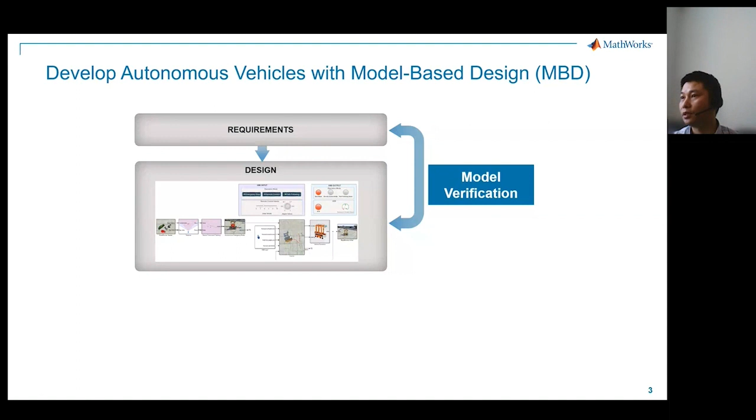your experience. Okay, and then we start kind of the iteration between the design and the requirement, and we can also verify the models with our design. So that's called the model verification phase. So in this phase, it is expected that we can find most of the bugs or the defects with the requirements or with our design. So that's the value and the benefit of using model-based design.

Okay, so after this phase, we can transition to the deployment, meaning that we can utilize the code generation products to generate the code instead of writing the hand code from scratch. And then we can start to verify the code with our design and the requirement. And this phase is called the code verification phase. Okay, so this is a very high level overview of model based design. So we start from requirements to design to deployment.

Okay, so if we go back to the topic on how MathWorks supports developing the autonomous systems with model based design. So what MathWorks offers covers ground vehicles, the UAV applications, marine robots, as well as manipulators.

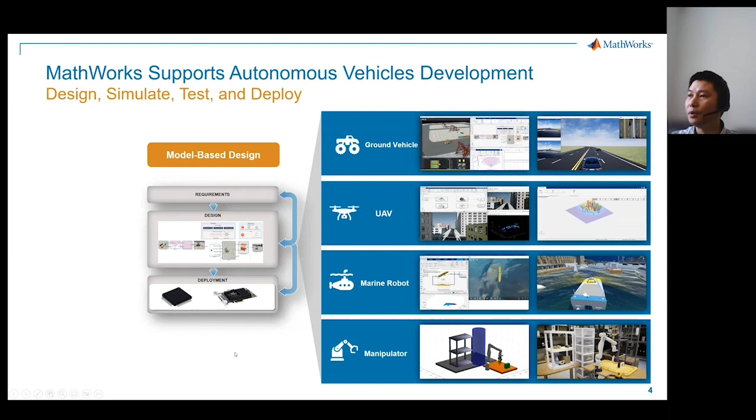Okay, so all these applications have similar technical areas such as system engineering, sensing, perception, planning, control, and modeling the vehicle platform. And also it covers the deployment, integration testing, connecting to the third-party simulators, let's say through ROS, and the verification and validation activities. Okay, so I hope this picture gives you an overview on what the MathWorks tools offer for the autonomous systems.

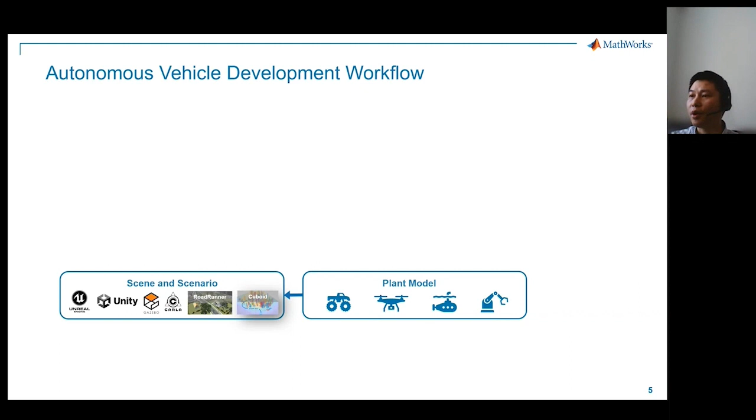And if we look at the data flow of how to develop the autonomous vehicles in more detail, we always get started from modeling the plant, meaning modeling the systems and modeling the vehicles. Okay, and then we also get started from modeling the environment. So we call it scene and scenario. And this scene and scenario could be in MATLAB environments such as the cuboid, which I'm going to introduce later on, or RoadRunner, as well as some third-party simulators such as CARLA, Gazebo, Unity, and Unreal Engine.

Okay, so once we have the scenes and scenarios, we can add the virtual sensors to get the synthesized sensor data, such as camera, LiDAR, radar, and some inertial measurement units.

Okay, so when we got this sensor data, we can feed these into our perception pipeline. So the perception pipeline depends on your use case, such as it might have the detection pipeline, the multi-object tracking pipeline, SLAM, localization and mapping, and estimating the risk or the threats.

Okay, so after the robot or the vehicle understands the environment, then we can start the planning. So the planning can be decomposed into different, I would say, phases or levels, such as behavior planning, path planning, collision avoidance, and trajectory generation.

So the last part of this data flow is the control. It contains, such as, the path following algorithms, the guidance for UAV applications, the low level, let's say the inner loop controller or the actuator controller. And then we can close the loop to the plant model. So this is the very high level data flow for developing the autonomous systems.

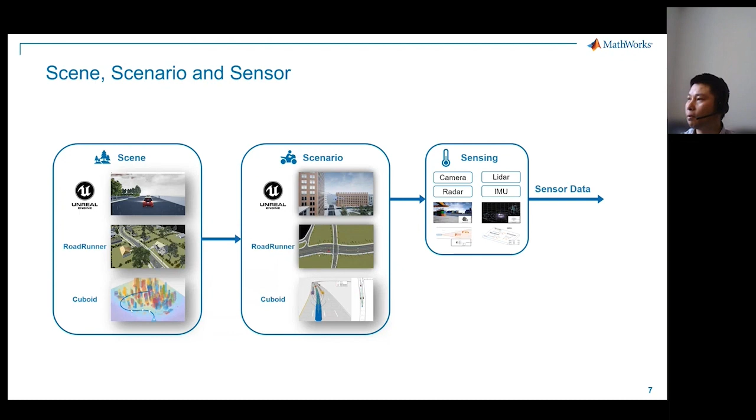And on the other hand, since we created the scene and the scenario from this simulation environment, not only can we get the sensor data, but also the ground truth. So this sensor data and the ground truth will be fed into the perception pipeline that I'm going to introduce later on. But right now, let me take the opportunity to introduce what MathWorks offers for creating the scenes and scenarios and the virtual sensors.

Okay, the cuboid simulation environment. So it looks like this. It's a simplified simulation environment, not photorealistic compared to Unreal Engine. And this shows the scenario designer app from the UAV Toolbox. So you can create a cuboid simulation environment interactively in this app. So this is the editor for the scenario and the viewer for the scenario.

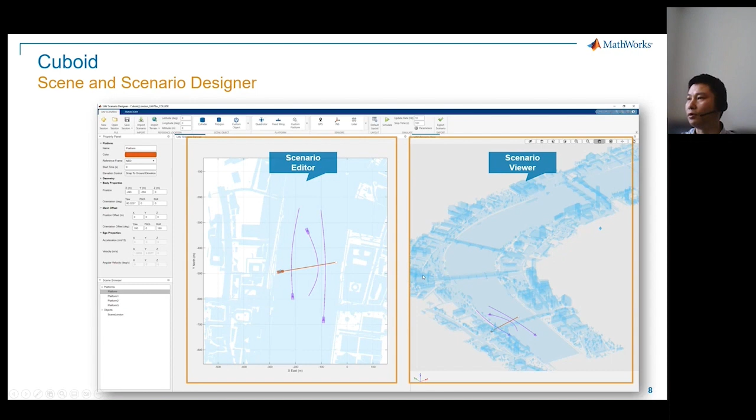And you can add scenes such as this cylinder or this polygon shape or any custom objects, such as this city scene. This is actually from London. This city scene is from a CAD model. If you have a CAD model, you can import it to create a scene. And likewise, you can add vehicle platforms such as UAVs, boats, or ground vehicles, and you can add your custom CAD model into the scene as well.

We also offer a bunch of different kinds of sensors such as GPS, INS, and the LiDAR sensor as shown here. We also have the property editor that allows you to edit all kinds of parameters, such as the parameters for the vehicle platform or the parameters for the sensors. And the last thing, this shows the actor list of all the actors that we have added into the scenario editor. So here is a recorded video showing how we can create these scenes and scenarios from scratch.

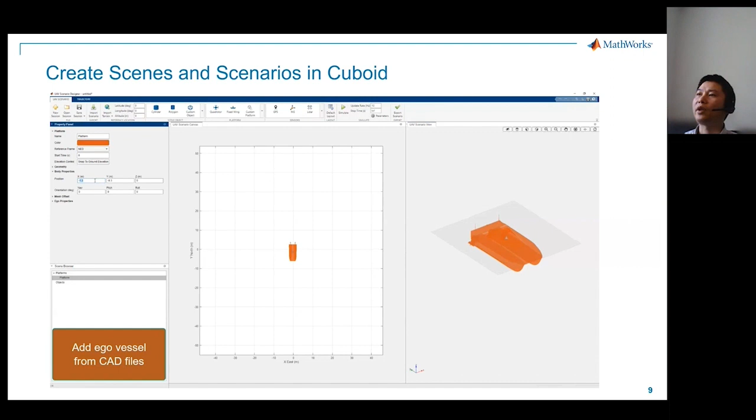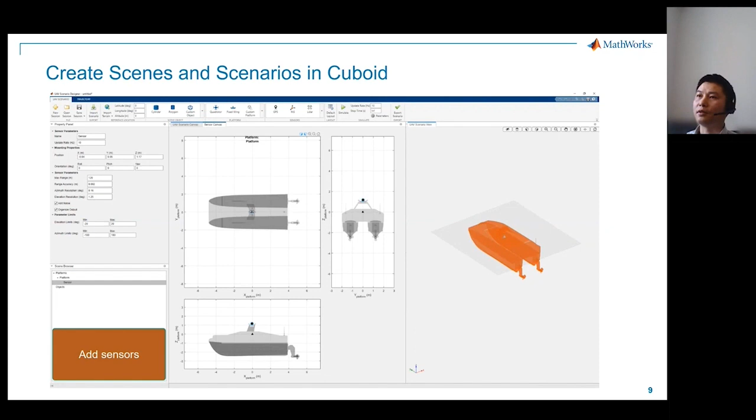So first of all, we import a CAD model. This is a boat, right? So we import the CAD model of a boat into the scene, and then we start editing a couple of parameters such as the colors or the locations and the scaling, and we also started to add, let's say, the LiDAR sensor. Yeah, exactly. And we can allocate the position and orientation of this sensor relative to the vehicle body. And after that, we can add more actors into the scene.

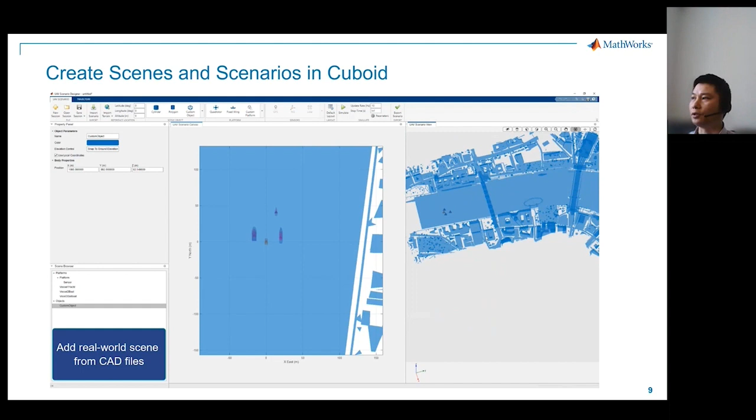And we can also specify the path, the waypoints for each of these actors, interactively. And we can also enable the trajectory table to specify, let's say, the speed and the timing in detail. After that, we can perform simulation directly from this app. So if we click the run button, then you can see the simulation result. And this is only for the scenes and scenarios viewing.

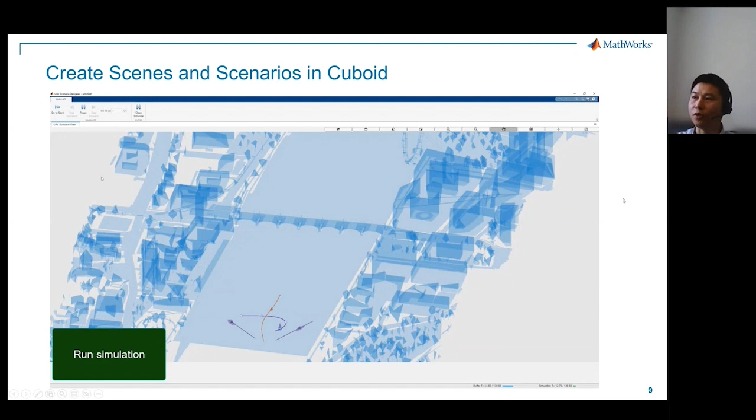Okay, I hope these recordings give you an overview of how the cuboid scenes and scenarios have been created. And we also offer a similar cuboid designer app dedicated for sensor fusion and tracking purposes, let's say for UAV applications. It's from the Sensor Fusion and Tracking Toolbox. It's called the Tracking Scenario Designer.

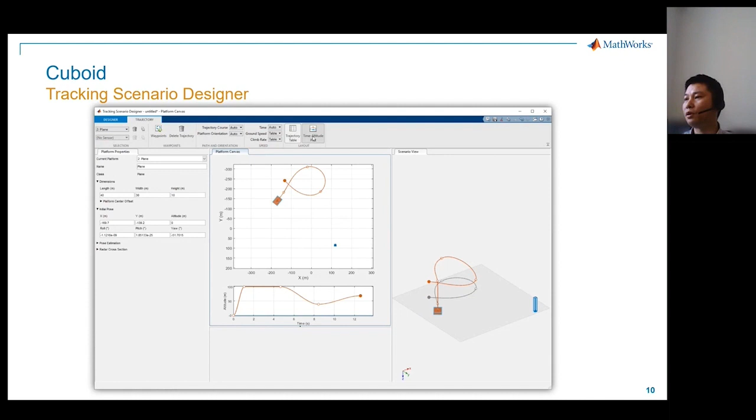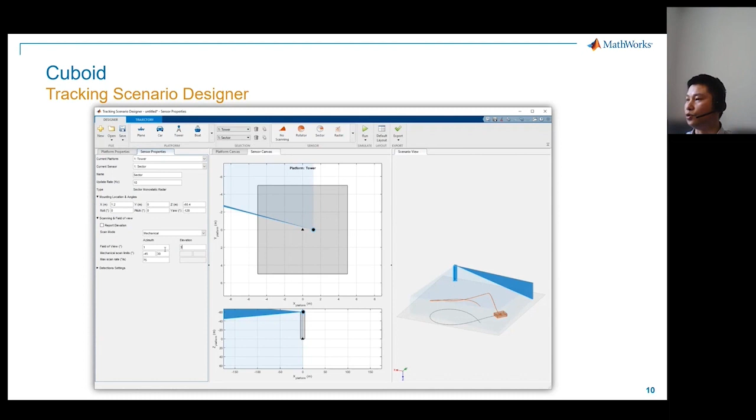So this is one of the examples showing how you can add the sector radar scanning the objects. And as you can see, the orange are the UAV objects. And we have specified the trajectory for the UAV. And we are adding a couple of these parameters for this radar and perform the simulation. And this is how it looks like in the app.

Okay, so the good thing about using the cuboid is that it's a simplified simulation environment. It's quick and easy to use, and it also brings you the value of creating variants for the scenarios. So you can create various kinds of scenarios and various kinds of static scenes, let's say adding obstacles and adding different sensors for trade-off studies for verifying your design.

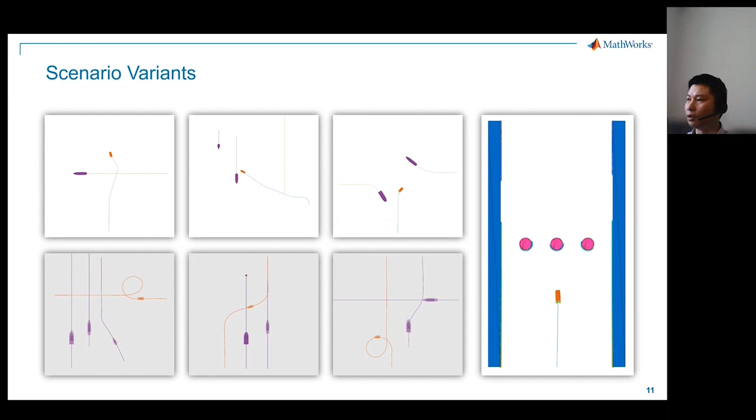And I would like to highlight the radar sensors from MATLAB and Simulink. We offer two different kinds of radar sensors, and both of them can mimic the ghost effect because of the multipath return. One we call the measurement level radar sensor, meaning that it is a relatively low fidelity model from, let's say, Automated Driving Toolbox or from the Sensor Fusion and Tracking Toolbox. And the other is regarded as a high fidelity radar sensor. We call it the signal level radar sensor, and it's offered by the Radar Toolbox.

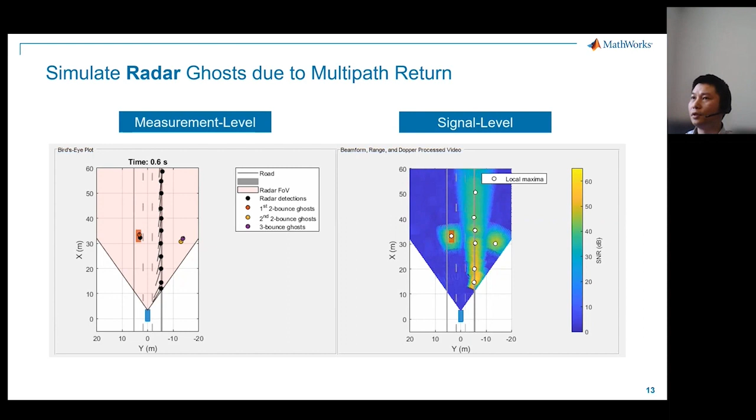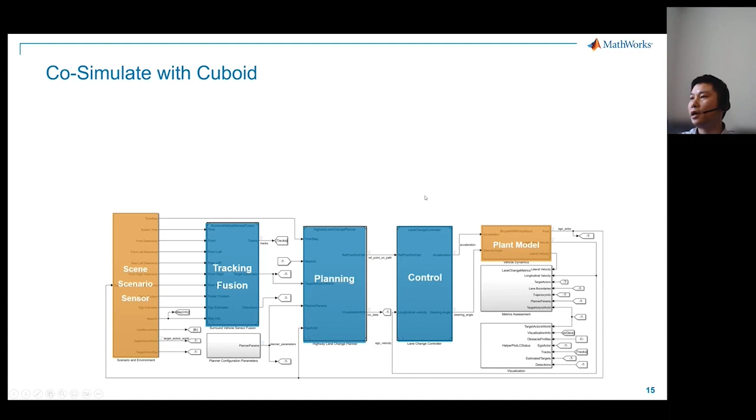And here is another example. So besides these cuboid blocks offered by the toolbox, you can add your software or your design into the Simulink model and perform the closed loop simulation, such as if you have the tracking or multi-object tracking algorithm, planning algorithm, or the control systems design here in Simulink. And here we also have the plant model as well as the cuboid scenario blocks that help you to connect with the cuboid.

Okay, so this is the cuboid. And if you have any questions, please feel free to type in the chat.

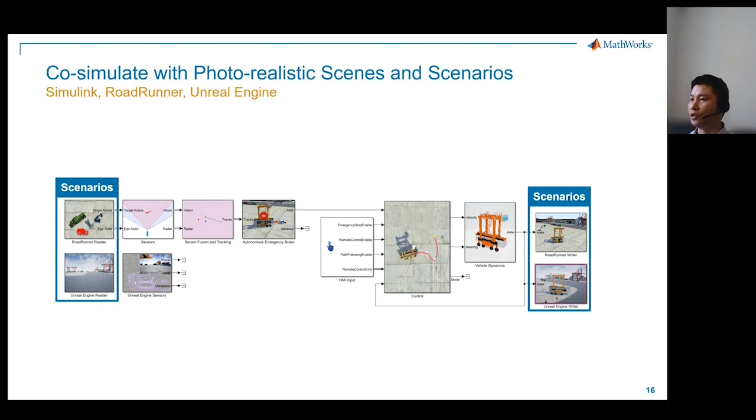So now we have our design in Simulink, and then we have these blocks that help us to connect, let's say, Unreal Engine or RoadRunner. I'm going to introduce RoadRunner in a few minutes. These are all photorealistic simulation environments, and these blocks help us to connect RoadRunner and Unreal Engine.

So this shows the simulation results of the co-simulation between Simulink, RoadRunner, and Unreal Engine. As you can see, there are a couple of sensors, such as the camera sensor, the point cloud generated by the LiDAR sensor, and the ultrasonic sensor in Unreal Engine, which is offered by Automated Driving Toolbox

or UAV Toolbox. And as the Simulink model is running, RoadRunner is running at the same time, at the same time step, and Unreal Engine is running the same way with Simulink and RoadRunner.

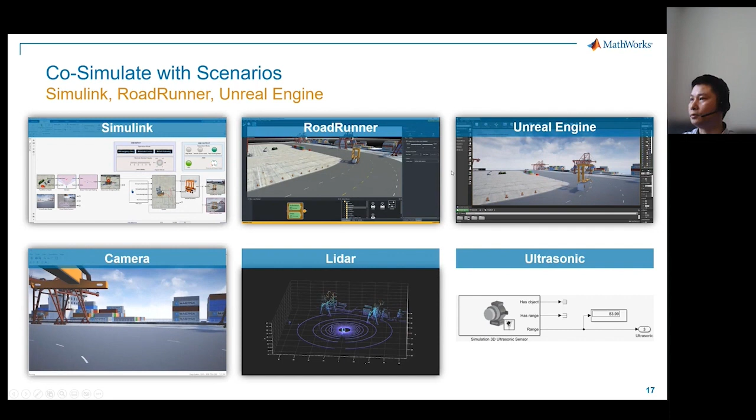And what is RoadRunner? RoadRunner is a tool that allows you to create the environment, let's say the urban city or the highway environment, in an easy way. So here shows an example where you can utilize the RoadRunner tool or the asset library in RoadRunner. Just drag and drop and create a scene.

Let's say you can go to the buildings folder from the asset library, drag and drop the buildings that you like, and place it on the scene. And then you can also use the prop set tool and select the trees that you like, and just drag and drop onto an area of the scene in RoadRunner.

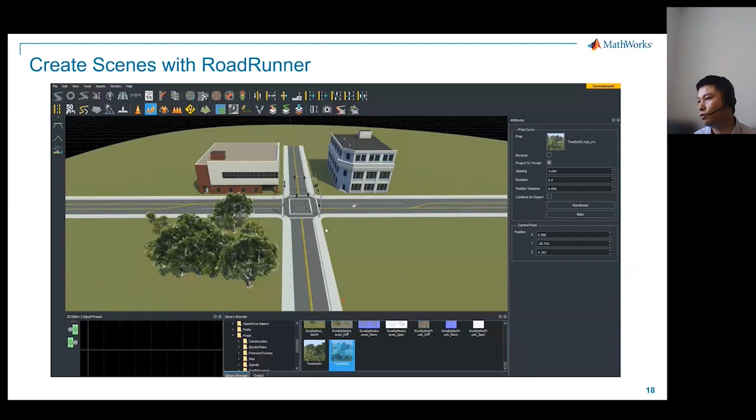And you can also use another tool, this prop set curve tool, to draw a curve on the scene, and then create these prop sets of the trees, and you can export it to different kinds of formats such as Unity, or Unreal Engine, or any other kind of format so that you can utilize this scene created from RoadRunner with another simulator.

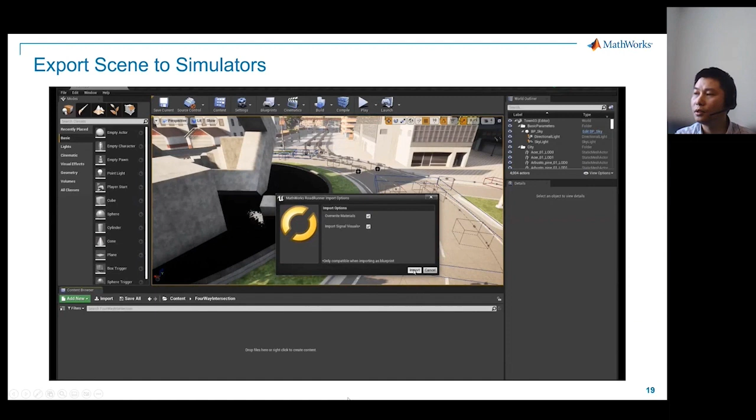So this is RoadRunner, and after you export the scene, you can import it into Unreal Engine. This is one example. I'm going to fast forward this. So this is Unreal Engine, and you can import all the files that we exported from RoadRunner into Unreal Engine. This shows a couple of steps, and it is written in the MathWorks documentation, so you can see this is exactly the scene that we created from RoadRunner, and now it's in Unreal Engine.

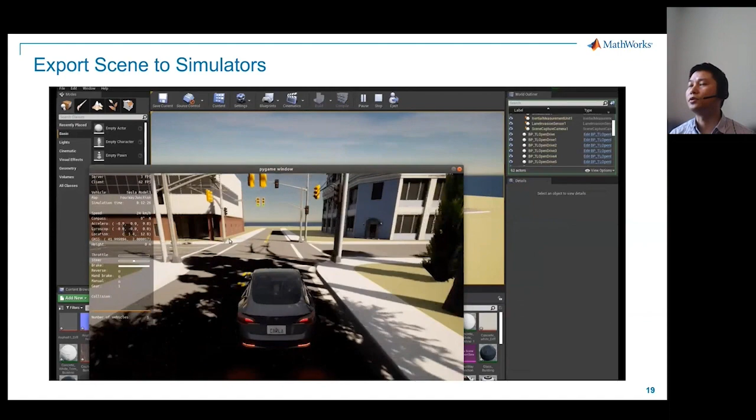So now we have the scene in RoadRunner, we have the scene in Unreal Engine, and then we can start the co-simulation with Simulink. So this is how RoadRunner and Unreal Engine work.

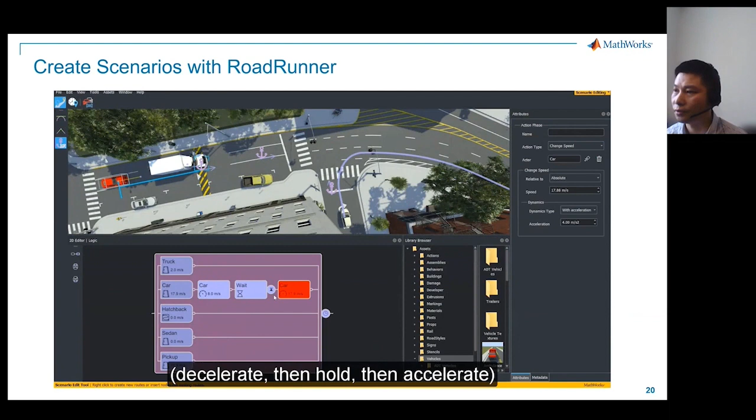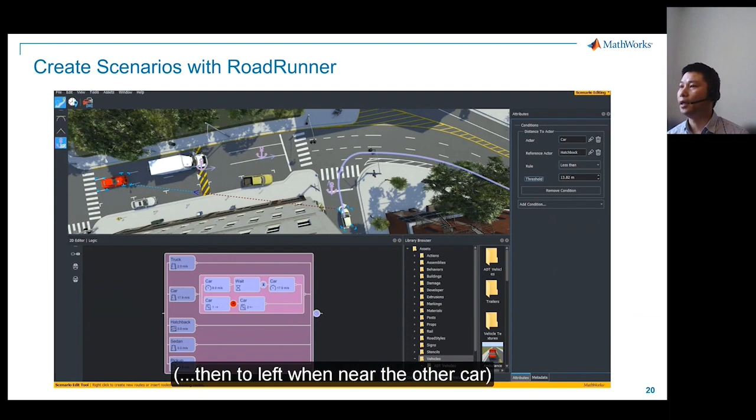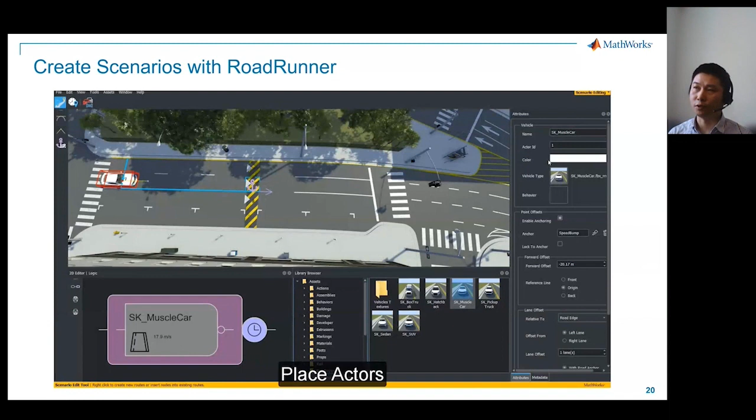And besides the static scene in RoadRunner, you can also create scenarios: we can drag and drop actors from the asset library or your custom assets, and we can specify the trajectories or the behaviors of the actors and parameterize all of this. We can also create a variable or parameter for the speed or any kind of parameter within the scenarios. And we can perform the simulation in RoadRunner to verify our design. So this is how RoadRunner Scenario works for creating scenes and scenarios.

And similarly to the cuboid environment, RoadRunner Scenario also allows you to create scenario variants in an easy way: you can parameterize the speed of the scenario and vary the speeds from 20 to 10 to 5. And you can also specify different behaviors and different trajectories for each actor to verify your design. And this is very easy to create.

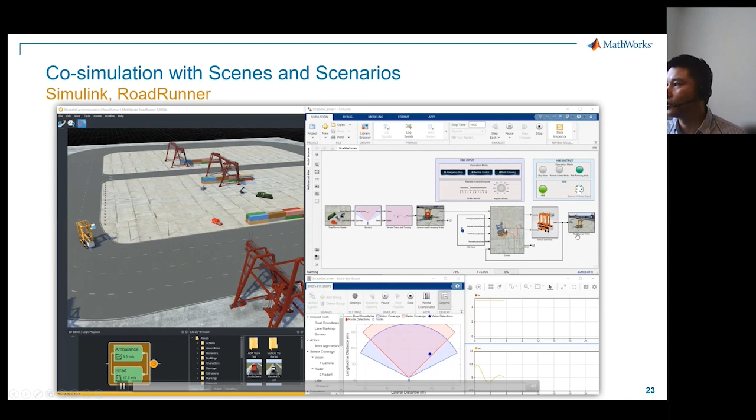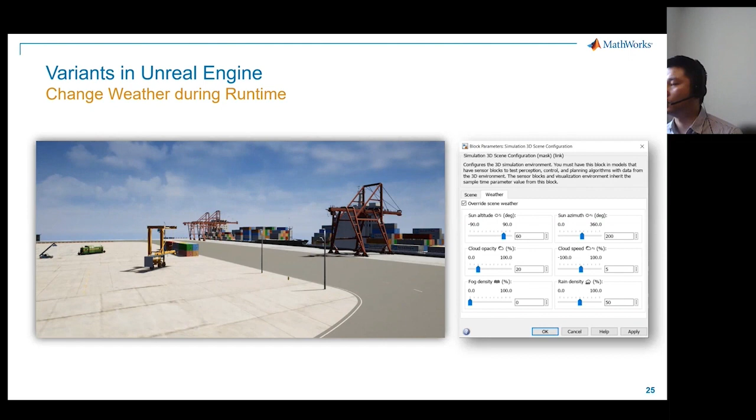One of the benefits of using the co-simulation framework with Unreal Engine is that from a Simulink model, you can vary the weather as well, such as the panel shown here. You can adjust sun altitude, cloud and fog density, sun position, and rain density as well.

Okay, I can see there's a question in the chat. Can we create scenarios with RoadRunner for surface vehicles, or is RoadRunner used just for land vehicles?

Of course. RoadRunner can also be used for surface vehicles. I have a demo, but it's not in this slide. If you like, I can share some of the slides later on with you. So the short answer is yes.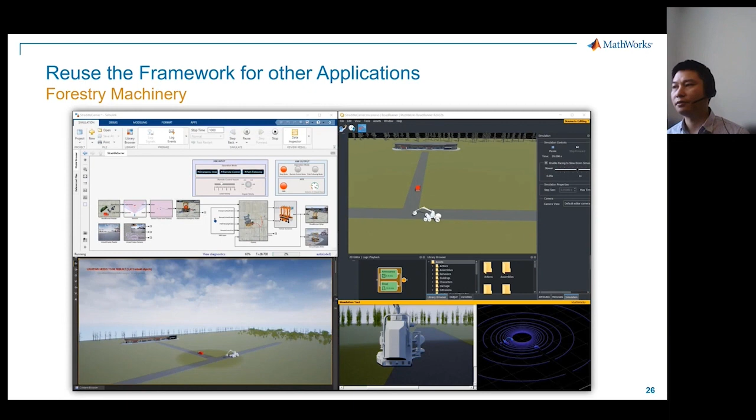So we have introduced this framework of co-simulating between the Simulink model with Roadrunner, Unreal Engine, or Cuboid. We can reuse this framework for any other applications because it's a 6 degree of freedom vehicle platform, such as these applications for forestry machines. We simply reuse the same Simulink model, the same framework, and do the same thing but with different scenes and scenarios, with Roadrunner and Unreal Engine, and maybe different sensors. So this is one of the applications for reusing.

Another application I've done for reusing this framework is mining. So now let's say we have a Simulink model containing a SimScape multi-body excavator model, and at the same time we create this model in Unreal Engine and add a few sensors here. This allows the SimScape excavator model to interact with the gravels from Unreal Engine.

This shows how it works, and it can turn, and then it will also drop the gravels later on. And you can see this is semantic camera, depth camera, fisheye, the point cloud. I hope this can give you some inspiration.

So we have talked about scenes and scenarios, Cuboid and Unreal Engine. We have talked about the sensors in Cuboid and Unreal Engine. And then so now we've got the ground truth, or we've got the sensor data, and then we can feed this into our perception pipeline as a next step.

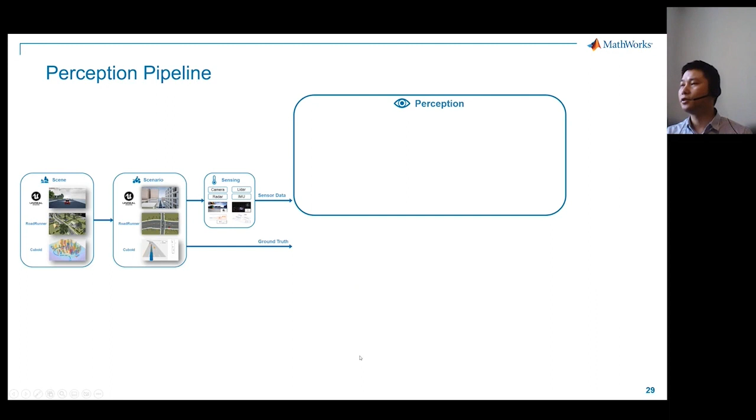So here is the previous figure. We have the sensor data, so then we can feed this into our perception pipeline. The high level perception pipeline looks like this: once we've got the raw data from the sensor, we start doing the pre-processing, such as downsampling for the point cloud or removing noise, etc. And then, depending on the use case, we feed this pre-processed sensor data into our object detection pipeline.

So this object detection could be, let's say, YOLO for the images. It could be a deep learning or non-deep learning method for extracting the object, let's say the bounding box, from the point cloud.

Okay, so we can generate this object list from the object detection pipeline, and then feed this into our object tracking system. The object tracking system can generate the tracks for each object, ideally. After that, we feed this into our threat estimation algorithms to estimate the threats, like if there's an obstacle in front. Is it a real obstacle? It could be anything. But the focus today is the detection of the object and multi-object tracking.

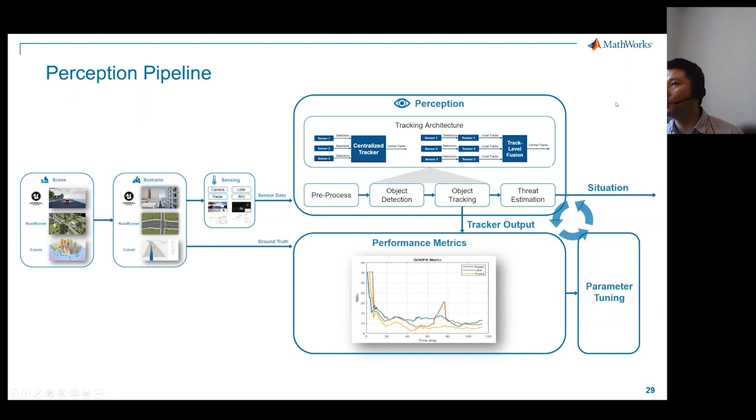So this is a high level perception pipeline. And finally, in most cases, you need to fine tune the parameters. The benefit of using these architectures is that we've got the ground truth, so we can use it to fine tune the parameters and iterate, creating an engineering iteration between the performance evaluation metrics and the tracking systems. So this is the high-level workflow for the perception pipeline.

I'm going to give you a use case for the ground vehicles. This is the cuboid simulation environment. We have two types of sensors. One is the automotive radar, meaning high resolution data, where for each object it can generate multiple detections. There is also one LiDAR mounted on this ground vehicle producing the point cloud.

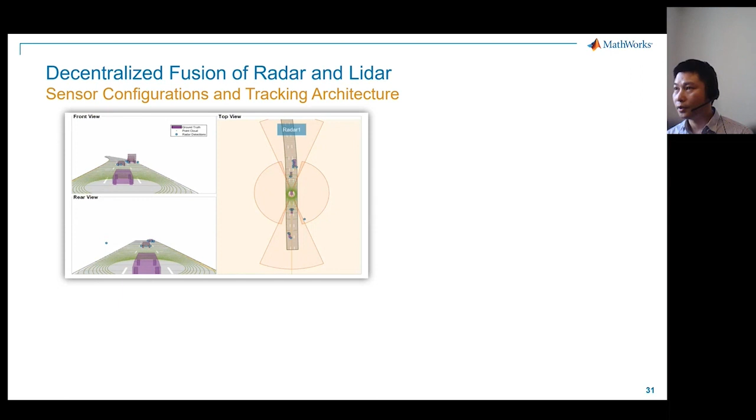First, we're going to show you the decentralized sensor fusion using the radar and LiDAR detections. Let's look at the sensor configurations. There are 4 radars and 1 LiDAR.

The architecture we're going to use is that we merge all the radar detections, which are the unclustered detections, and then feed all these detections from the radar into these extended object trackers, meaning the GM-PHD tracker. On the other hand, we have the point cloud from the LiDAR.

The pipeline is that we can generate this bounding box, using deep learning or non-deep learning methods. Once we have this bounding box, we feed this into our point object tracker. In this case, we selected the JPDA tracker to generate the tracks from the LiDAR detections. So the decentralized tracking architecture is that we can have a track level fusion and generate a final track. This is something that we offer from Sensor Fusion and Tracking Toolbox.

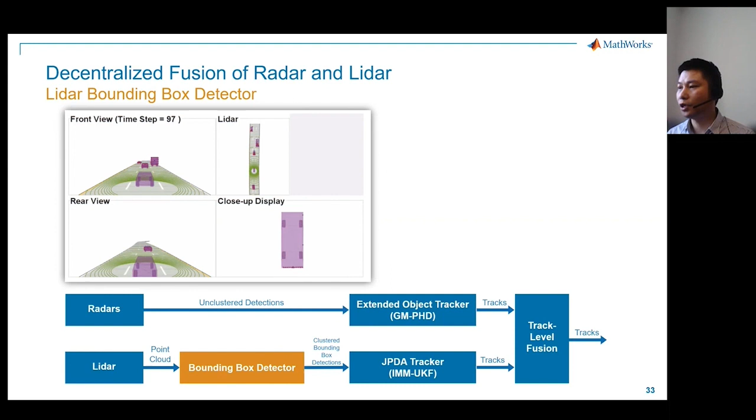If we look at the details, for the LiDAR detection, the first step is that we can use, let's say, a non-deep learning method for simply clustering the point cloud XYZ for generating this bounding box. Here's how it looks, and we feed this into our point object tracker, the JPDA. So the bounding box, this red rectangle, is something that we generate as a track from the point cloud.

Here is another thing: we utilize all the radar detections and feed this into our PHD tracker. The PHD tracker is an extended object tracker, meaning it will give you not only the position but also the orientation and size of the object. The value of using the extended object tracker is that it utilizes all the information from this high resolution automotive radar without losing any information.

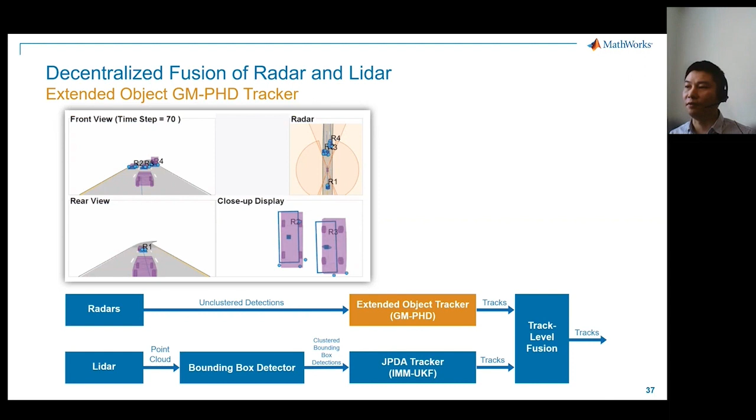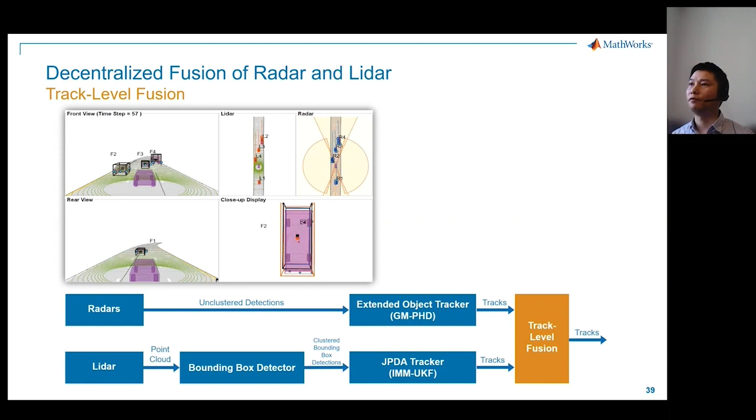The last step is that we can use this track level fusion algorithm offered by sensor fusion and tracking toolbox to have a final tracking. The black bounding box shows the final tracks. Ideally it should be more robust and stable. I hope this gives you an overview of how to use these capabilities from the toolbox for sensor fusion and tracking.

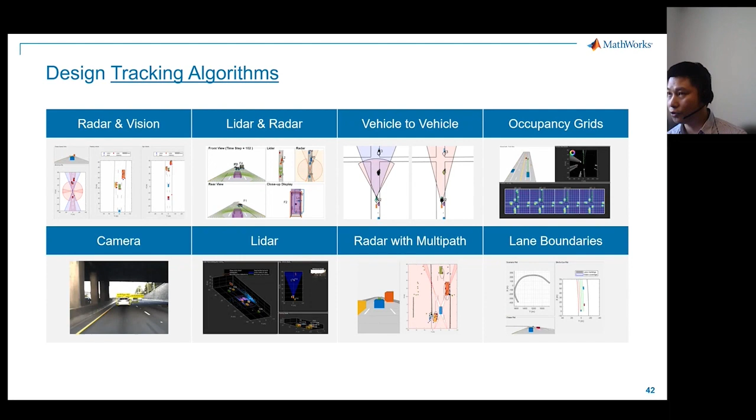If you would like to learn more about the tracking algorithms that MathWorks offers, please feel free to reach out or have a look at these shipping demos from the toolbox. These shipping demos can come from sensor fusion and tracking toolbox, automated driving toolbox, or UAV toolbox.

Regarding the detections, we feed them into our trackers. The detections could be coming from, let's say, the deep learning method with images, or from point cloud. One of the benefits of using deep learning with MATLAB is that you can utilize the app designer, meaning the deep network designer, to graphically and interactively design your deep neural network with apps.

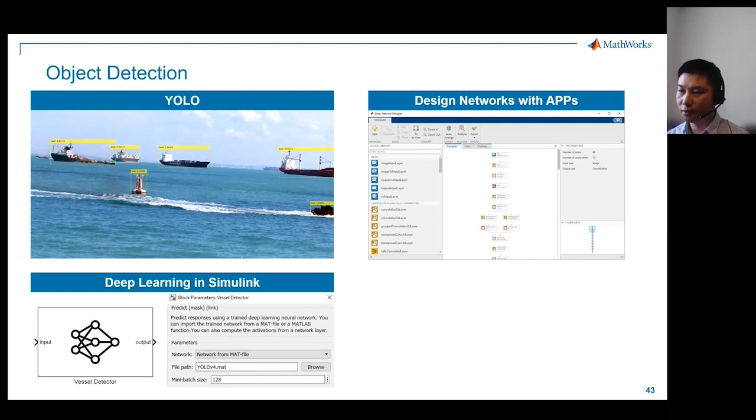Also, if you're a Simulink user, I think from the 22A or 21B release, you can run a deep neural network in Simulink. We provide this Simulink block that allows you to run, for example, YOLO for detecting boats or any objects.

And if you are using a third-party deep neural network, we also provide a path that allows you to import, say, Caffe, TensorFlow, or PyTorch models to run from MATLAB. On the other hand, you can also export your MATLAB deep neural network and run it within another framework. So this is the bi-directional way.

Here shows results utilizing synthesized data for detecting objects from the simulator, such as this one from the Unreal simulation environment. We get virtual images and virtual point clouds, and we can utilize, for example, PointPillars, which is a deep learning method, for detecting objects or extracting bounding boxes from the point cloud.

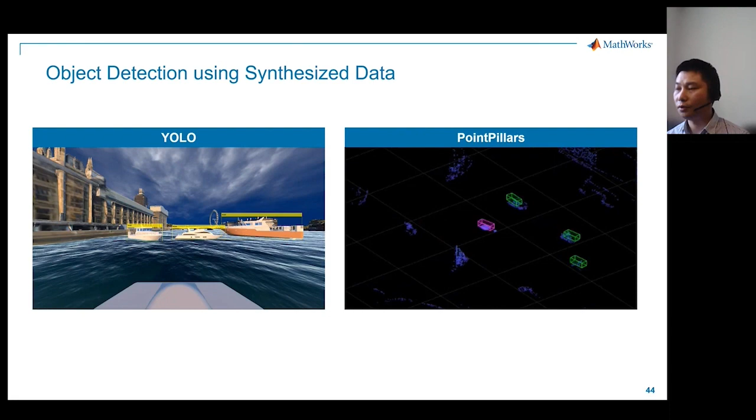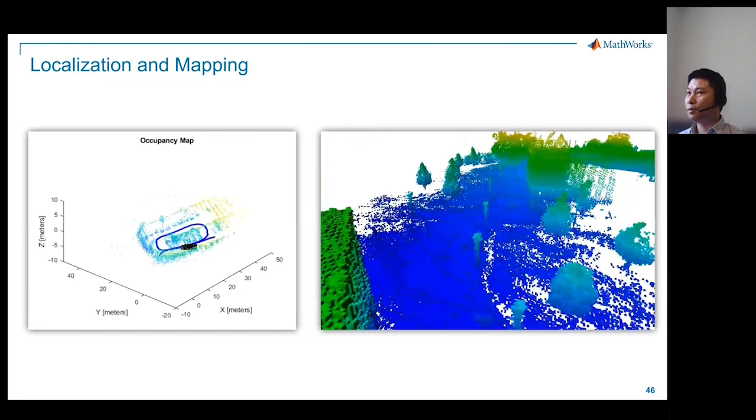Regarding perception, another topic that is becoming more and more popular is localization and mapping, or SLAM. Here are some of the capabilities offered by MATLAB: we offer pose-graph optimization based SLAM algorithms, from navigation toolbox and sensor fusion and tracking toolbox. We also offer a data structure, under the hood an oct-tree, that allows you to store this 3D occupancy grid efficiently in MATLAB. The video on the right hand side shows this.

If you want to know more about localization and mapping, please feel free to have a look at these shipping examples from automated driving toolbox, UAV toolbox, and sensor fusion and tracking toolbox. If you have any questions, please feel free to write in the chat.

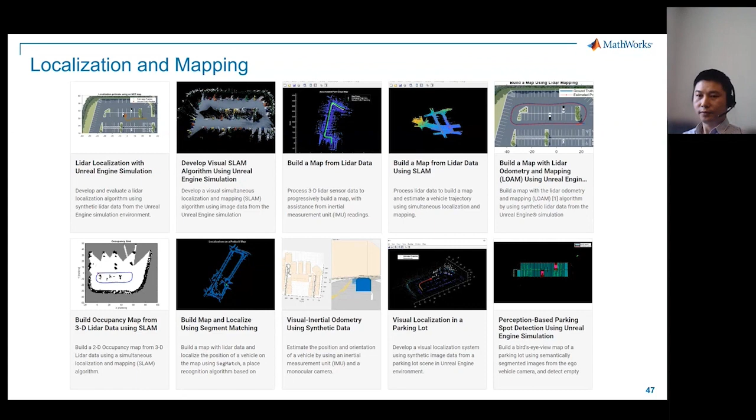I have introduced the perception pipeline at a high level, and I'm going to move on to planning and control. Now we have the detections or the tracks for the objects, and then we can start the planning. The output of the planning is to generate the trajectory that we can feed into our path following or trajectory following algorithms. This is the main output from the planning. The planning is not an easy job, right?

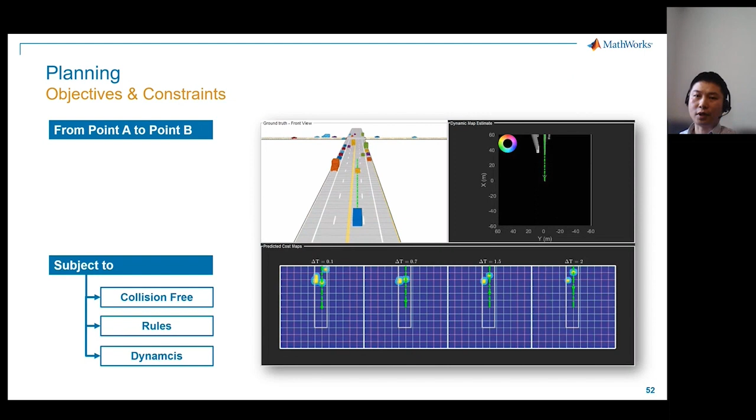The objective of the planning is easy, right? It's from point A to point B, but actually it's not easy because it has constraints. The planning should be subject to a couple of criteria or constraints, such as it should be collision free. It should be compliant with certain rules, such as road rules or any other rules defined by human beings. And it should also be subject to the constraints of the vehicle dynamics, such as the turning rates and turning radius, etc.

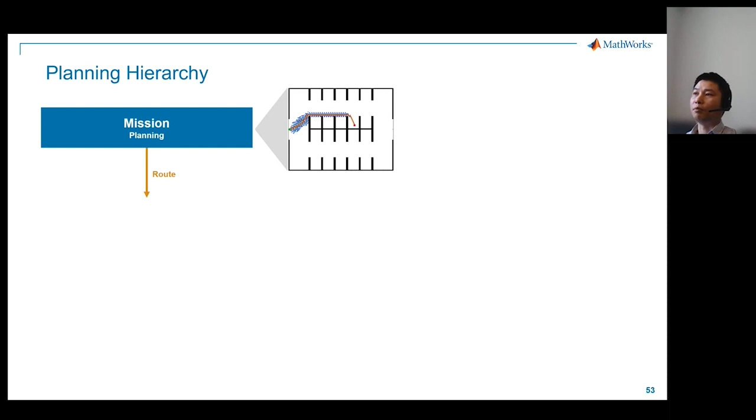So in order to solve this problem, the industry usually tries to decompose this planning and have this planning hierarchy. It could be slightly different, but more or less the same hierarchy in the industry. So we can start from mission planning, meaning that we have the route. We can generate the route on a map. Depending on the applications, this route could be graph-based, which is not shown here in this slide, and MATLAB also offers graph-based functions that allow you to search the route.

And here in this slide, it shows that if the map is in the format of an occupancy grid, we also offer a couple of algorithms which are commonly used for this global planning to generate the route, let's say the hybrid A star or the RRT star.

Okay, so after we have this route, you can start planning the behavior to generate the maneuver. So let's say you have a route for the ground vehicle from point A to point B, but it's a rough route. Because there might be obstacles, there might be pedestrians, there might be any other kind of moving objects or actors in between. So you have to decide if you should stop, do a local planning for generating a collision-free path, turn left, turn right.

So you have to decide the behavior of the vehicle. And here I have seen a lot of customers use Stateflow for defining these transitions or behaviors, such as using it as a state machine for defining the transitions of a flow chart. And I also see customers use MATLAB language for defining these behaviors.

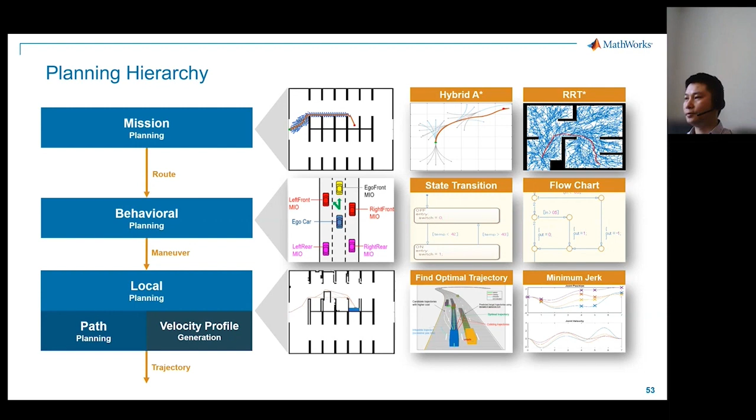And I will move on with control. So for control, as you might know, there are a huge amount of customers who use Simulink as the design platform for defining the control. But today, since the topic is autonomous systems, I'd like to highlight just one thing, the path following. So we offer a bunch of path following algorithms from the tools.

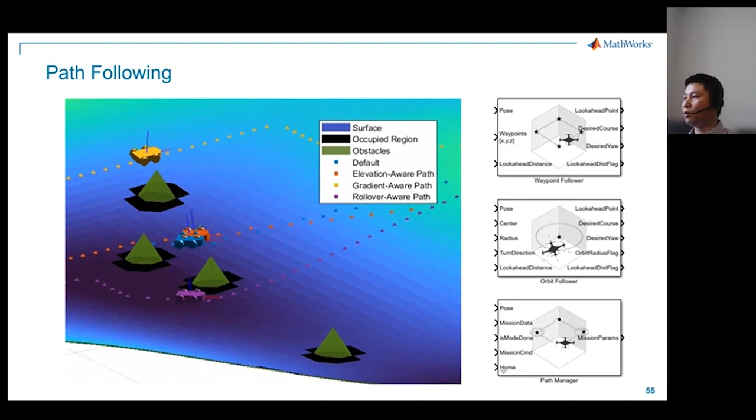So for ground vehicles, we have pure pursuit, and for UAV applications, we have a bunch of path following algorithms, shown in this slide, from UAV Toolbox that allow you to have a quick test or simulation with the blocks provided by UAV Toolbox.

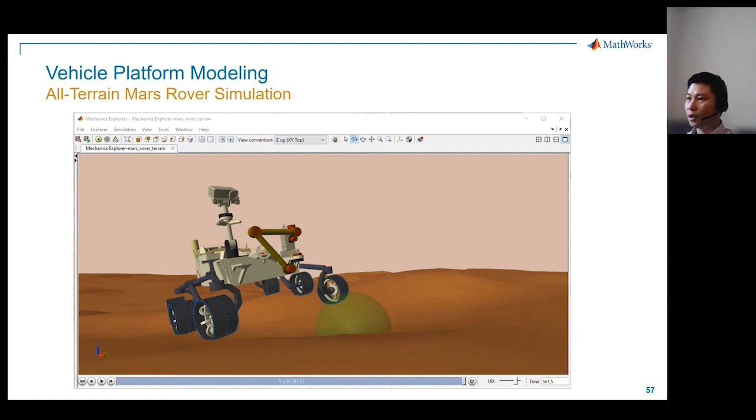So the last part of this data flow chart is modeling the plant. Of course you might be familiar with modeling the plant, the vehicles, with Simulink. And this is an example showing how to model the Mars rover using Simscape, meaning Simscape Multibody, Simscape Electrical and Driveline. And this is the animation provided by Simscape Mechanics Explorer. You can also utilize this as a visualization and to do trade-off studies.

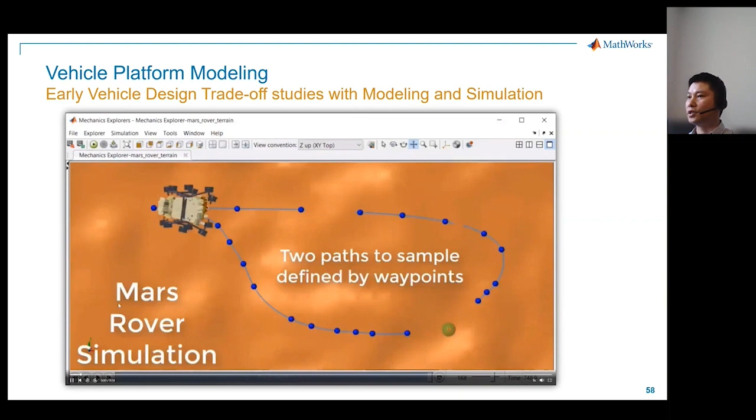All right. So now this is a brief recap. Now we have covered this closed loop, so now we can close the loop for these autonomous systems. And how about deployment, right? We have talked about the design, and in the context of Model-Based Design, you can utilize the capability for deploying your design onto the embedded platform.

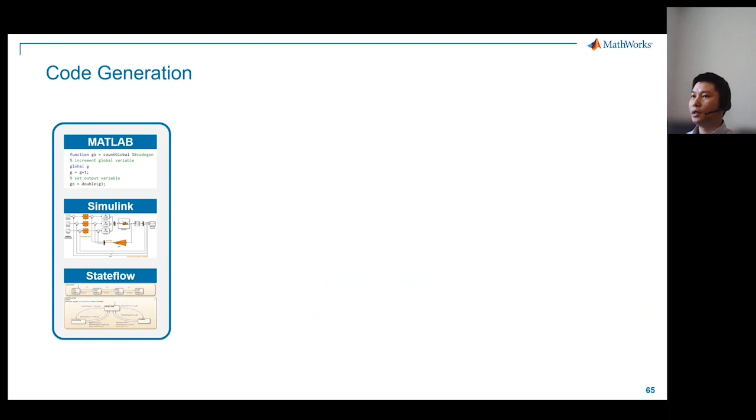As you might know, we have the code generation products. Let's say you have MATLAB, Simulink and Stateflow; with the coder products you can generate C++ code, which can be deployed on the CPU or the MCU, or the GPU Coder that allows you to generate optimized CUDA code running on the NVIDIA GPU, and FPGA HDL Coder, PLC Coder, and ROS 2 blocks.

And in the bigger scope of developing embedded software for autonomous systems, not only can you utilize the code generation capability, but the software should also be compliant with a certain standard, such as MISRA C and C++ for automotive, or for general purposes. And static analysis to verify if the generated code is compliant with a certain standard, or has any software defects, such as divide by zero, or overflow of arrays or integers.

And of course it should be compliant with the functional safety workflow if you have this requirement. You also would like to consider how this design or automated testing workflow can be plugged into your CI, the continuous integration platform, and how to connect external simulation environments using ROS and ROS 2 or DDS. These are all aspects you need to consider when developing your embedded software for autonomous systems.

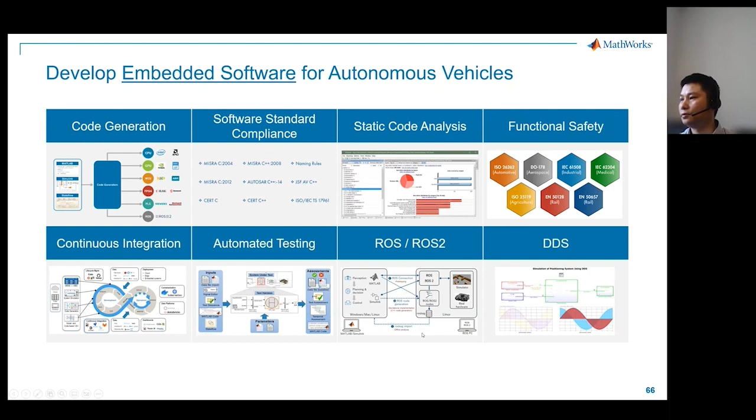Today I'm going to highlight the ROS and ROS 2 capabilities. Let's say you have a MATLAB or Simulink model, and you have your external ROS environment. This ROS environment could be robots as a ROS node, real sensors, or virtual simulators such as Gazebo, AirSim, etc. These are all ROS nodes. In ROS 1 the nodes are connected with the ROS master; in ROS 2 there's no master, but under the hood is DDS. All these ROS nodes can be connected with topics, services or actions.

What MathWorks offers from ROS Toolbox is, first of all, you can connect to the ROS environment directly. It's more for prototyping, so you can connect a Simulink model or a MATLAB script directly with this ROS environment. Secondly, you can deploy your MATLAB and Simulink model directly on the ROS environment as a ROS node. Under the hood, it generates C++ code, compiles the code, and generates a ROS or ROS 2 node running on the ROS environment. So this is the second capability.

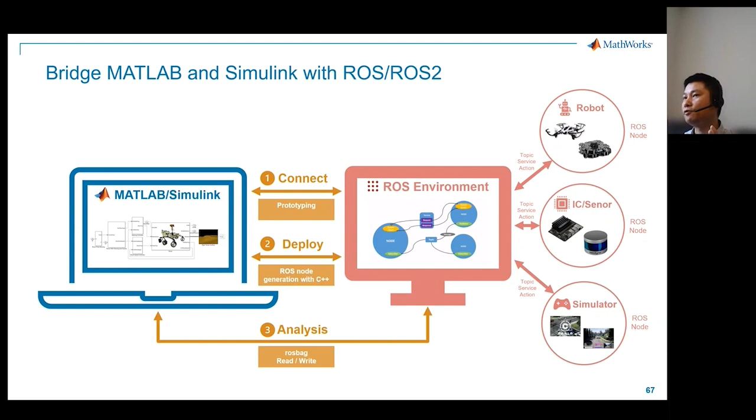So let's say this is an example. We have the detection and control logic defined in Simulink. Then we can add the ROS subscriber or ROS publisher to interact or co-simulate with this simulation environment, which is actually a Gazebo simulation environment. During the simulation, you can go into the Stateflow chart diagram to look at what's happening and debug this Stateflow chart interactively.

And here shows an example of deploying the ROS node. Okay, so now we have four systems: behavior planning, motion planning, control, and vehicle models. So we have 4 different systems. And then we can bring all this together onto our top model and perform simulation. So this is how the simulation looks like, and it's following the path, etc.

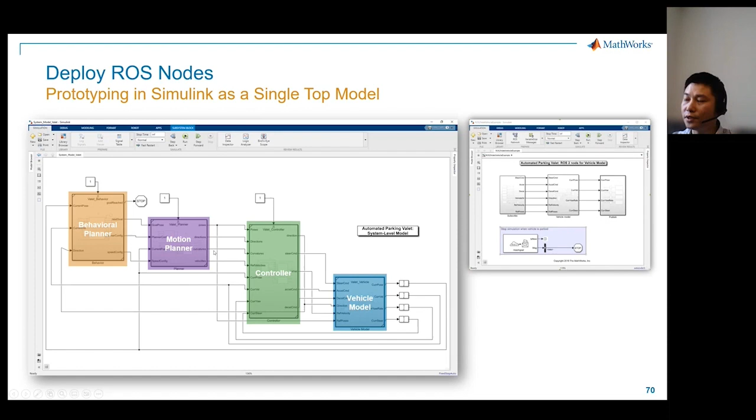So in order to deploy all these systems as ROS nodes, I'm not sure if you're familiar with the concept. So here, if we look at the top model, all these are model references, meaning that under the hood, all these subsystems are already in the format of a standalone Simulink model, which is called a model reference from a top model perspective.

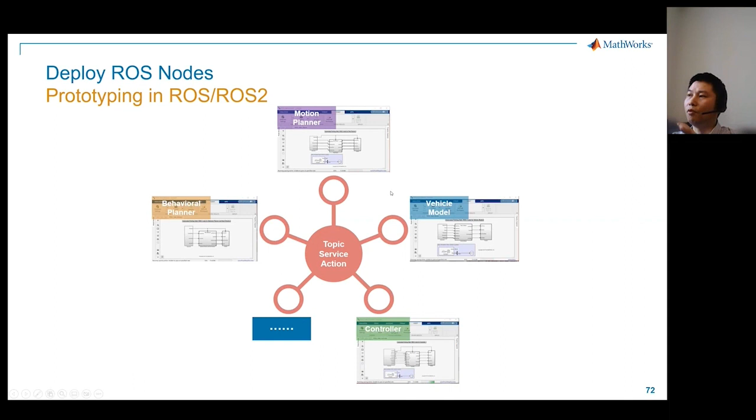So now what we need to do is add these ROS elements, such as publisher, subscriber, and these actions, etc. So we add these ROS components into our Simulink model. And after that, we can still do simulations and prototyping in only Simulink, so that we can do this simulation for all these ROS or ROS2 nodes from Simulink.

So after that, for each single Simulink model, you can either select build model or build and run. With that, it will generate C++ code, and somewhere you can specify the compiler, let's say colcon, or the ROS workflow for compiling the generated C++ code as a ROS or ROS2 node and deploy it onto the ROS environment. So this shows how it works at a high level.

So if you are interested, you're welcome to learn more about this from the shipping demos. We have the shipping demo for generating CUDA code from ROS running on the NVIDIA GPU.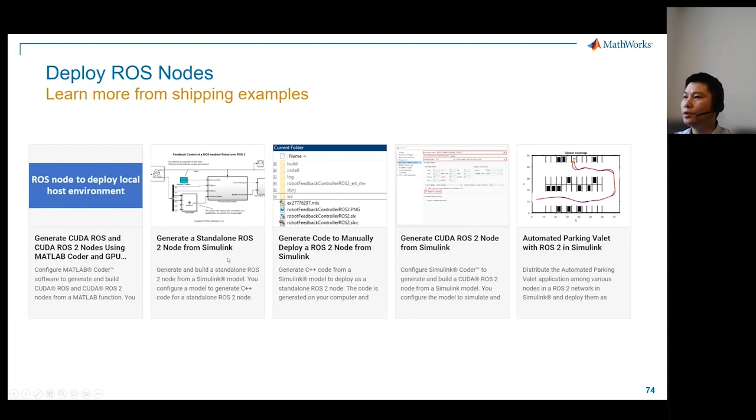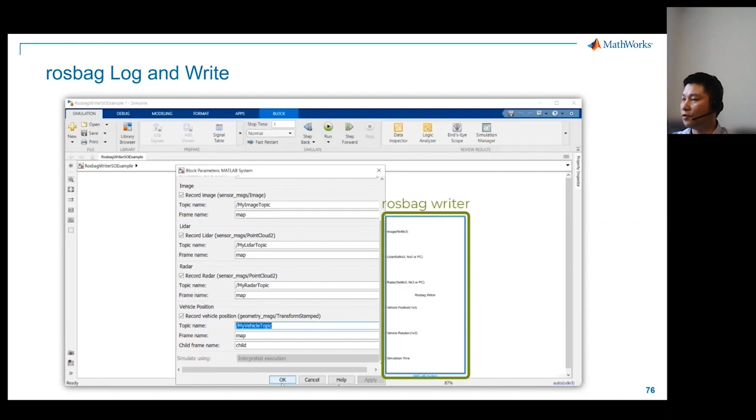The last thing about ROS, I will highlight rosbag playback, read and write. So here shows an example. We offer this rosbag Simulink block that allows you to read, replay, and visualize the rosbag data from Simulink. On the other way, you can also write, with this write block. So you can capture these topics, messages, and services, and write all this information as a rosbag.

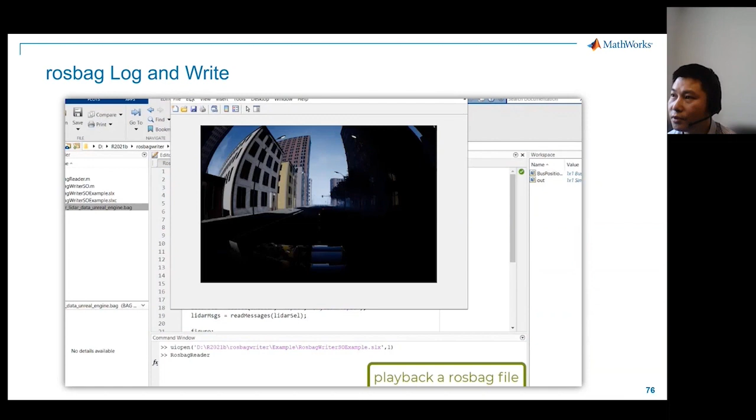So after you click the simulation, this is a co-simulation with Unreal Engine, I believe. And you can see this Unreal Engine co-simulation is running and it is recording the rosbag. And then we can use this MATLAB script for reading this rosbag and visualize it. So this shows how the rosbag read and write works.

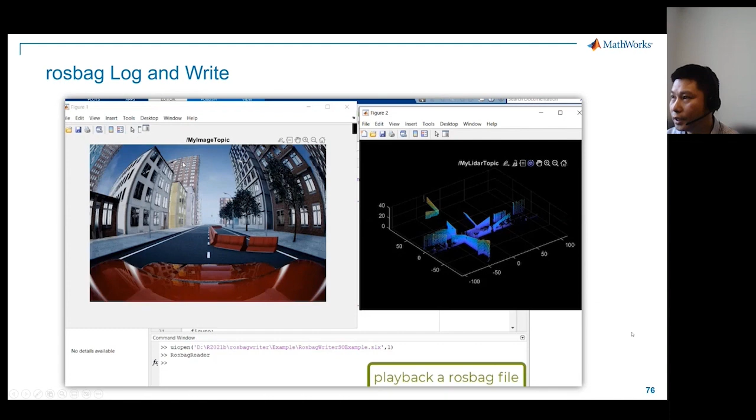So perhaps I would like to take this opportunity to briefly introduce AI, just a couple of slides here, because we have introduced this autonomous system development workflow for each part, right? And maybe you would be interested in seeing how other customers utilize AI for these parts.

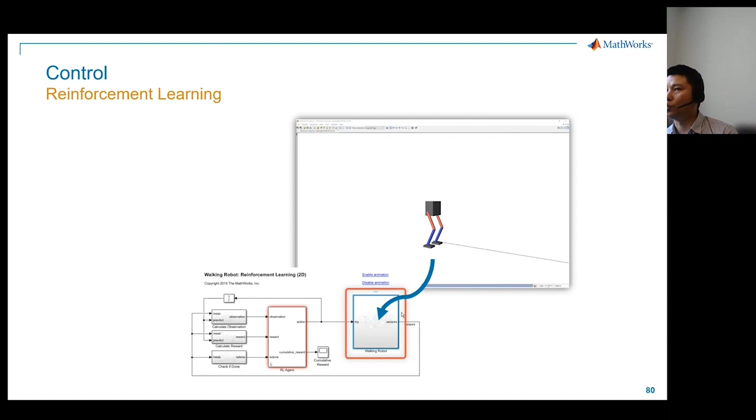So first of all, I wanted to introduce control. Some customers started considering using reinforcement learning. So this is a part of AI. Let's say you have this walking robot model in Simscape, and you also have this controller. And the task is to enable the robot to walk. A simple task. It looks simple, but actually not.

So the reinforcement learning is regarded as an agent, and in this agent, the algorithm could be in the format of a deep neural network, so you can utilize this visualization or this app for defining the deep neural network. Then you also need to define the cost function, let's say the reward function, to calculate the reward.

So you don't have to have the ground truth data, because it's unsupervised learning, right? And then you let the reinforcement learning algorithm fine tune the parameters. When it falls down, it will figure out that the reward is smaller, and how to get a bigger reward automatically.

Okay, so this is the reinforcement learning. And also I can see there are more and more customers that are thinking about using deep neural networks for reduced order modeling. So what is that? Let's say for powertrain or the motors, some of the models are very complicated and run slowly, right? And they're thinking about if they can use the deep neural network to reduce the order automatically. And this is a very good fit for model-based design, right?

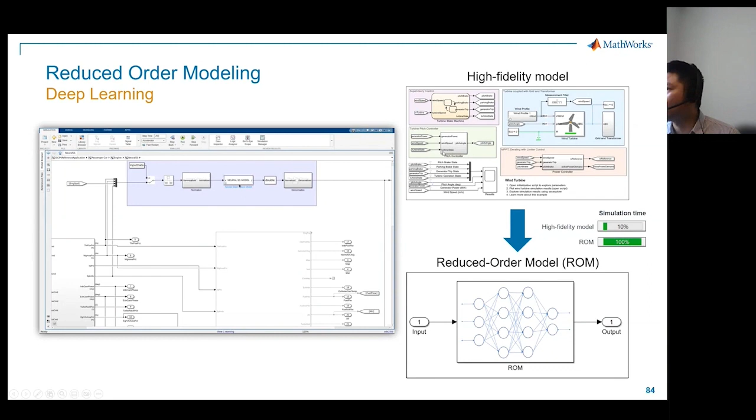So let's say here you have a complicated model, let's say a wind turbine model, then you can design your own deep neural network and get the ground truth data for training, and then you can verify with the validation data set or the test data set. So you can verify this deep neural network, and after that, if you're satisfied, you can use this reduced order deep neural network to replace the original model, and this can significantly speed up the simulation in some cases.

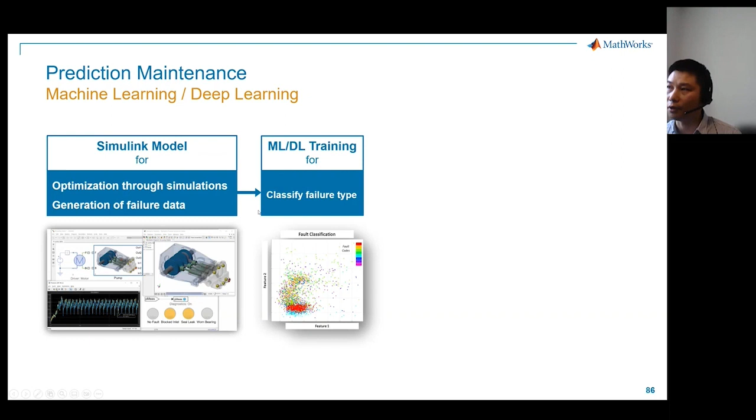Okay, and I can also see some customers use machine learning and deep learning for predictive maintenance, meaning that in Simulink or in Simscape, you can generate the failure data. So you generate failure data, and then you feed this into the machine learning and deep learning workflow, meaning that you have the ground truth, and then you can start training the classification of the failure type. And once you have the predictive maintenance model, you can utilize it to estimate the time to failure. Okay, so this is how it works for predictive maintenance.

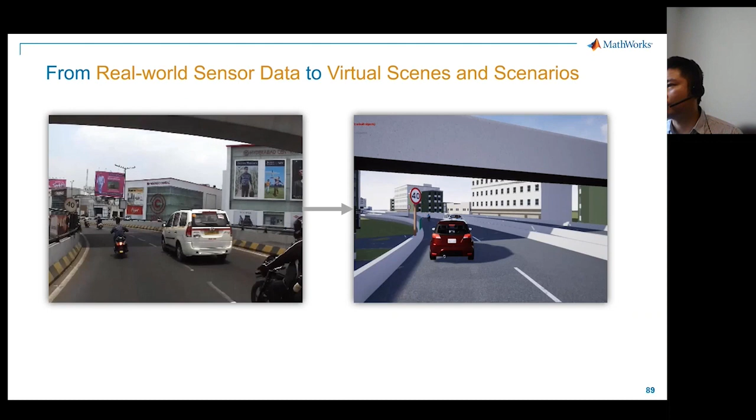And the last use case for AI applications I'd like to introduce is to generate virtual scenes and scenarios from real-world sensor data. So here is an example: you can utilize real-world data, such as images from a camera or the point cloud from LiDAR, to generate these scenes in, let's say, RoadRunner, because you can detect the lane markers and these objects, and then generate the same thing in RoadRunner. Okay, so I hope this gives you some inspiration for how AI can fit into this workflow.

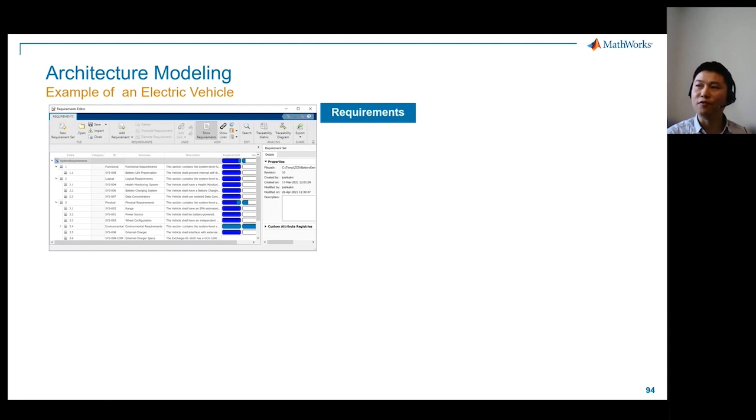So the last part today, I'm going to give you a very brief overview of how the systems engineering workflow and the functional safety workflow can fit here using model-based design. This is an example of the architecture modeling of an electric vehicle. So we always start from requirements. The Requirements Toolbox or the Requirements Editor allows you to import or create the requirements and manage them with the editor. As you can see, you can review the requirements, and it will indicate if these requirements have been implemented or verified by test cases.

Okay, so if the model or the system is very complicated, we usually have this high-level architecture, or maybe different kinds of architectures. For example, the functional architecture. It defines the input and output functions. Let's say the path-related functions, power system functions, the motor-related functions, etc. So it's a functional-based architecture. And by the way, the tool for creating this architecture of the systems is called System Composer.

And we can also create this logical architecture, which is defined by systems. So it could be, let's say, the power management system, the driving management system, or the motor control systems. And we can allocate the functions that we defined in the functional architecture into this logical architecture.

And finally, we have to define which embedded platform we are going to allocate these logical functions on in the physical architecture. We have three stakeholders here: the driver, a human being; the vehicle structure, which has nothing to do with the systems, it's a plant model; and the systems, which is the embedded system or the controller for all of this. So this is only an example, but it shows that you can create different architectures, allocate the functions and logic onto this physical architecture, and have the traceability matrix between the requirements and the architecture.

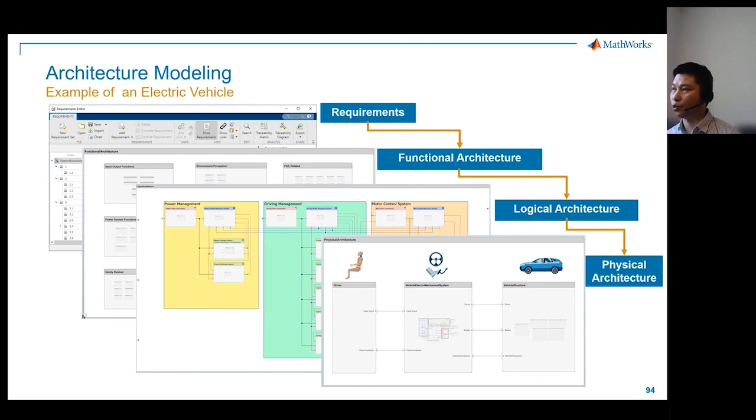Okay, so how does the functional safety workflow work? We usually start from vehicle level requirements, and then we decompose them, or we develop the functional safety concept or technical safety concept in the context of, let's say, ISO 26262 or IEC 61508. And then we can further move on with the system or the software requirements.

So now we have a software requirement, then we can start using the tool for designing the software architecture to allocate the requirements, and then to implement it in Simulink as an implementation model. And from there, we can generate the C and C++ code, maybe CUDA code or FPGA code. And we can use the compiling and linking process to get the object code. And this is the final package that we run on the embedded hardware.

And the functional safety workflow with Model-Based Design looks like this. It not only contains the forward path for developing the system, but also some feedback paths. The key feedback path at the model level contains the architecture verification and the static model analysis, meaning that it will check if our implementation model, our design in the model, is compliant with certain industry standards, such as MathWorks, JSF for aerospace, or ISO 26262 for automotive.

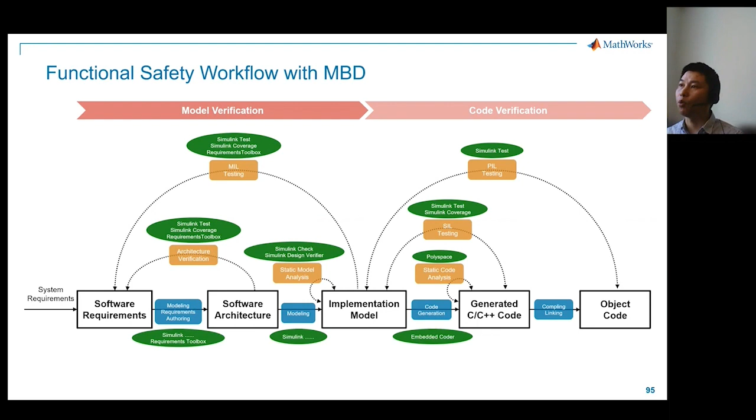Qualified tools are required by, let's say, DO-178C or ISO 26262. Meaning that in order to achieve the goal of compliance, not only should you perform these activities, but also the tools within these activities should be qualified. So this is also one of the values of using the MathWorks tools.

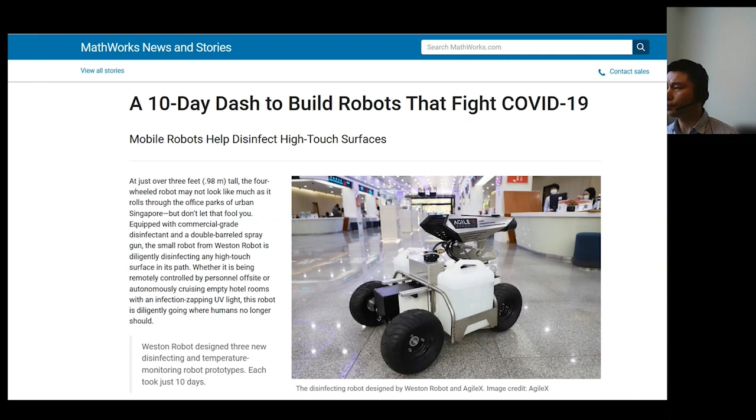So I hope that I have given you a high-level overview of developing autonomous systems with the Model-Based Design workflow. And here, just a few last slides showing some customer user references for your reference, such as these mobile robots for COVID-19. This is located in Singapore. They used our tools for developing this in, I think, 10 days.